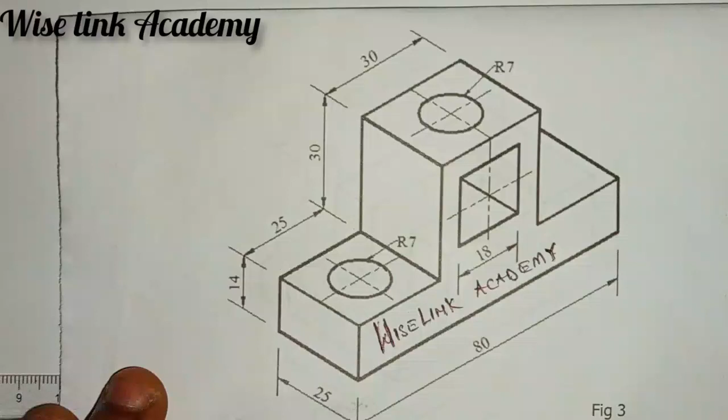Today we want to reproduce this isometric drawing. Whenever you hear the word isometric drawing, the first thing we need to do is draw our horizontal line and our inclined 30-degree line. The second thing you need to know is the height and the breadth. So let's first draw the horizontal line and the inclined line of 30 degrees.

Take your set square this way and draw a horizontal line, as you can see my horizontal line. Then take your set square and draw an inclined line of 30 degrees. You can see my 30 degrees. You come to this place too of 30 degrees. As you can see, what we are having.

Now let's proceed. The next thing to do is take your set square this way. At the center point here, you project a line, a faint line upward. You'll be having this, so you can see what you're having. I have successfully drawn my inclined line of 30 degrees, 30 degrees on each side.

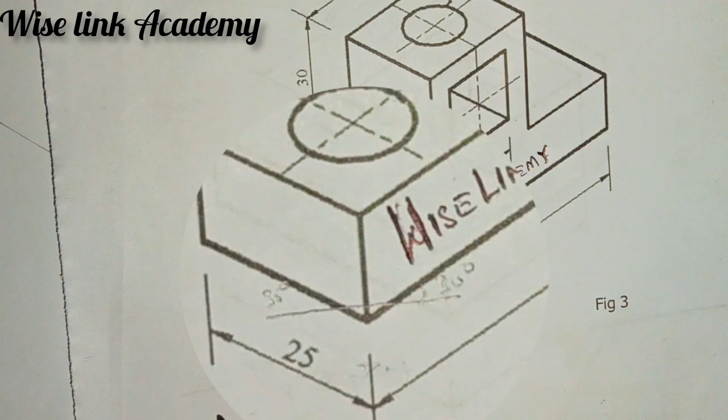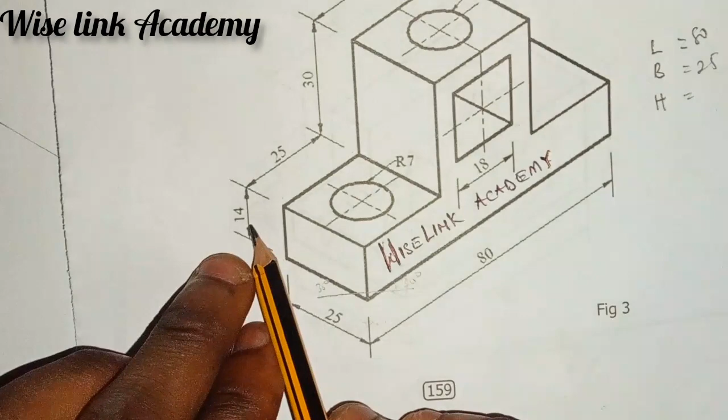Let's proceed. The distance from here to here is 80, and from here to here is 25. First we need to know the length, the breadth, and the height. The length is 80, the breadth is 25, and the height is 14 and 30. So 14 plus 30 will give us 44. So our length is 80, our breadth is 25, and our height is 44.

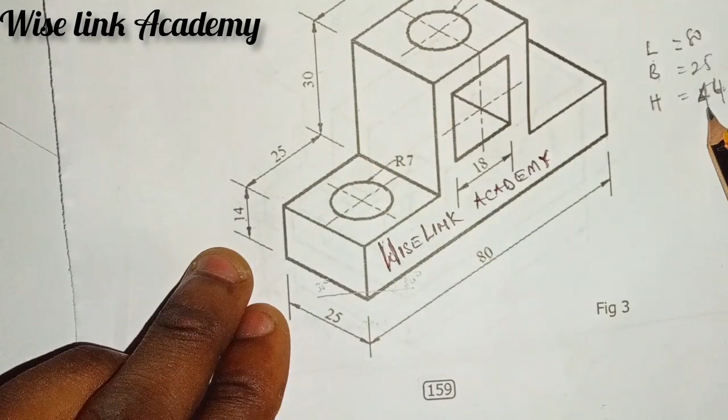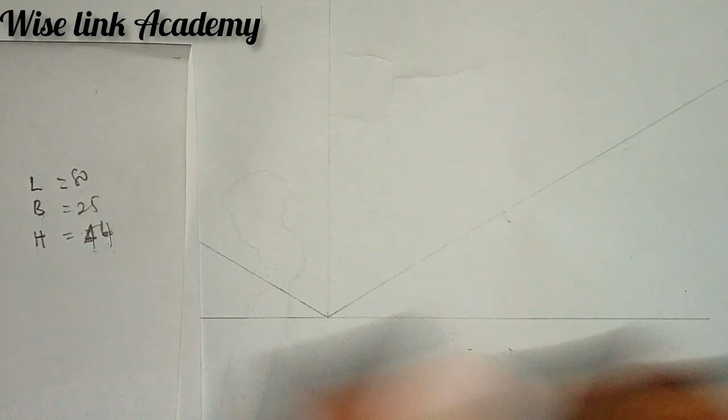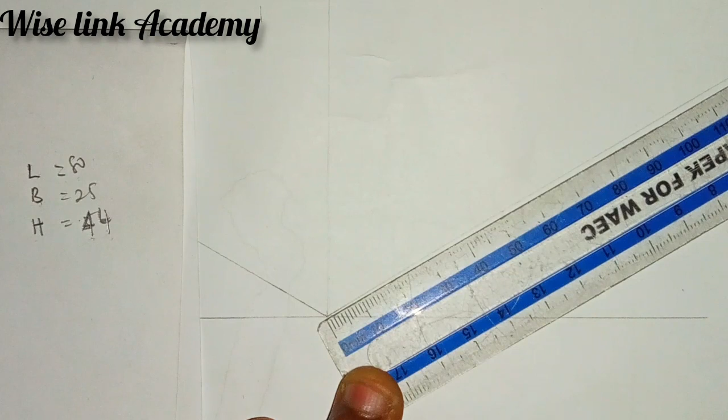So now let's draw this out. With our measurements, our length from here to here is 80. Let's measure 80 on our meter rule. From here to here is 80, as you can see. Then don't just leave it, indicate it.

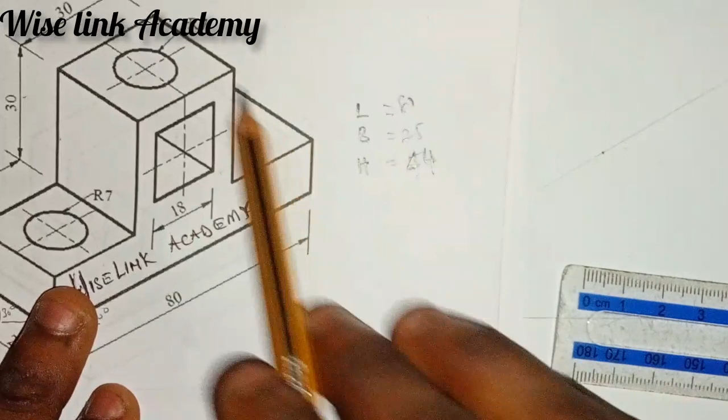The next one is here to here is 25. From here to here is 25. You are asked that the height is 44, isn't it? Let me show you, the height of this is 44 as we said earlier. So now let's do the necessary things we need to do.

With your T-square, you place it this way. As you can see, you place your set square on it. This point you have drawn, this 80 point, you draw it upward. This point 25 here too, you draw it upward as a faint line. As you can see, you'll be having this.

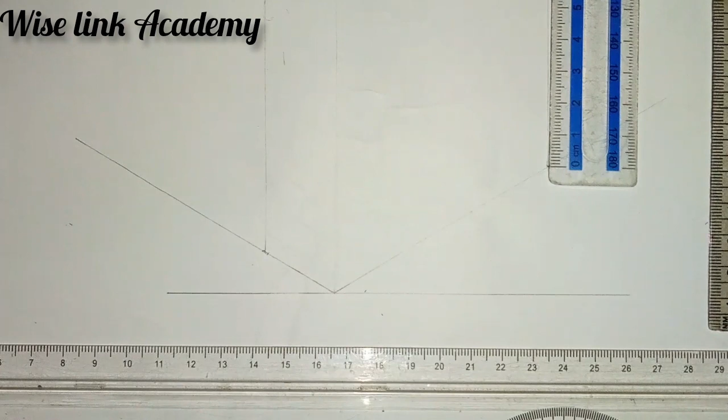The next thing is they said the height of this is 44, so let's measure 44 from here to here. Let me show you what I'm doing. Measuring 44 from here to here is 44, isn't it? So this is my height of 44.

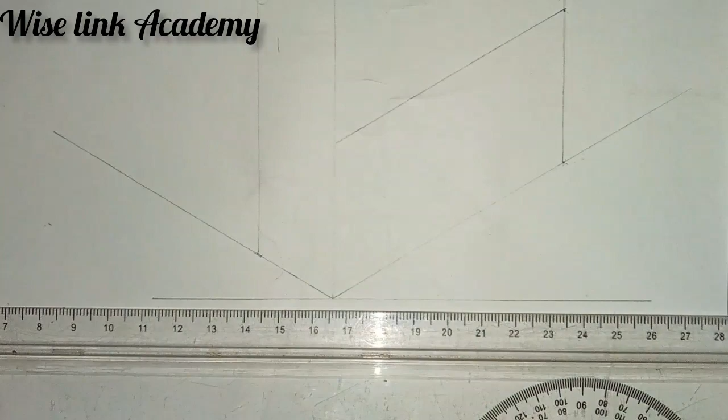So the next thing for me to do now, I have indicated this 80, 25, and 44. You take your set square this way, place it at this point here, and draw a faint line to this point here. As you can see, you take it again like this. Can you see that? You draw a line inclined to this.

As you can see, our aim is to form out a box, because anything isometric is carved from the box. So now let's cover this way. Can you see that? So you take out this like this. You take it this way. So where they are meeting, let's join it very well so that they meet properly. So they are both meeting at this point, as you can see.

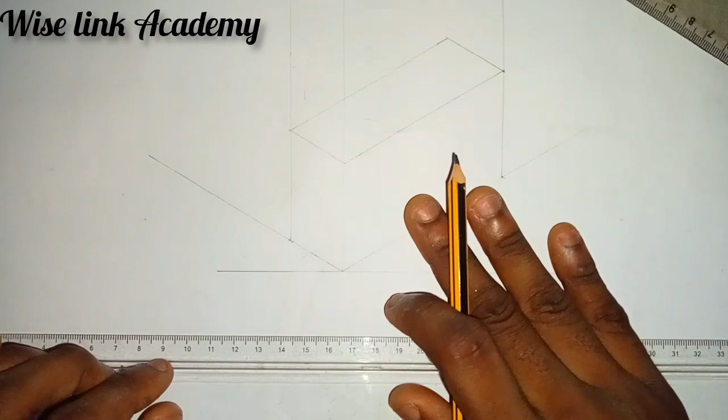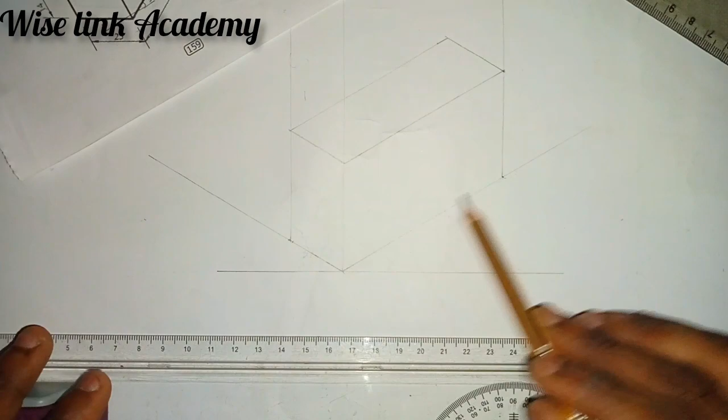So we have formed out this shape. From this shape now, I want to reproduce this. So here to here is thickened, and here to here is thickened. Let's thicken that. Here to here is thickened, here to here is thickened. I'll be having this.

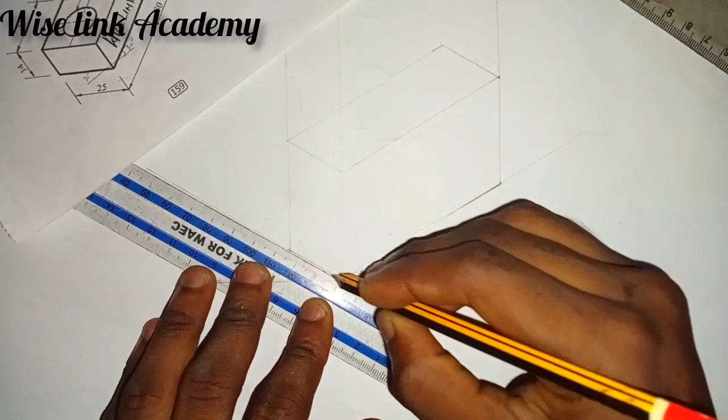Here to here is thickened, as you can see. Let's proceed. Here to here is thickened and here to here is thickened, isn't it? What do you observe in this place?

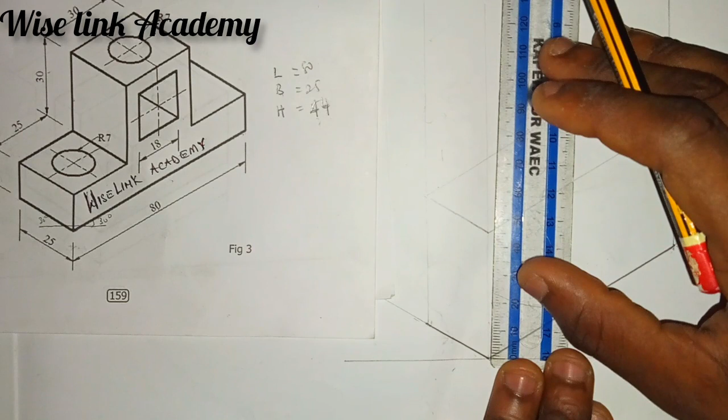Distance from here to here is 14. That is, from here to somewhere here is 14. Let's do that. So 14 is from here to here, somewhere to here. So this is my point 14 here.

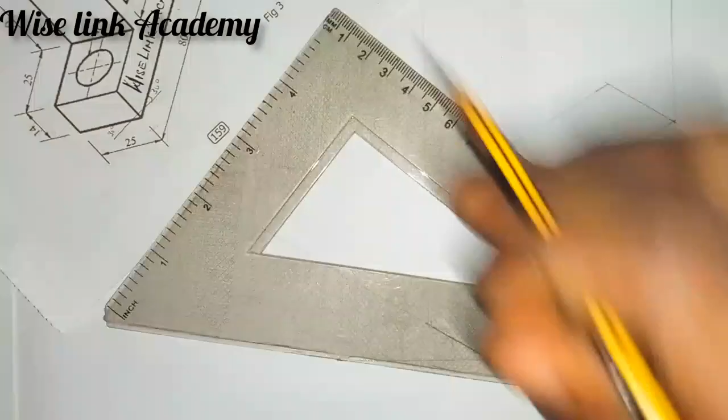I'll just take my set square this way, incline this way. From that point, you take it to this point here. I see that now with a faint line. You take it like this again to this point here with a faint line. But what do you notice?

Here is thickened, see? Let me show you. You can see that here is thickened. Let's thicken it. Thicken this place. I thicken this place.

It's thickened, isn't it? The next thing is what? Here too is thickened. As you can see, this place too is thickened. Let's thicken it. Here too is thickened. You can see that here too is thickened.

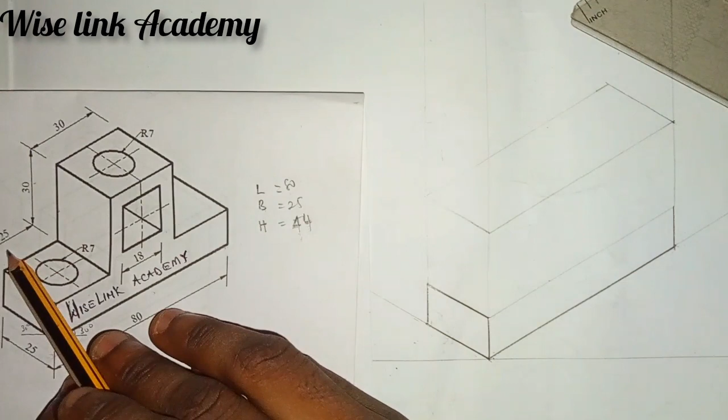So the next thing is what? They said from here, distance from here to somewhere here is what? 25. Can you see that now? From here to somewhere here is 25. From here to somewhere here is what?

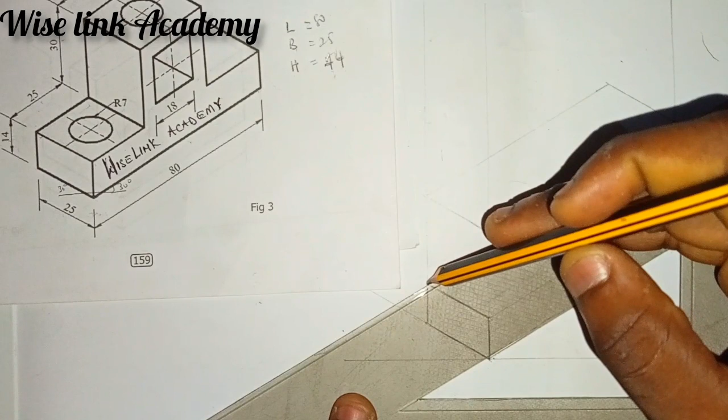25. That is, you take a set square this way, or you just measure 25 from this place, or you take it this way. You set square this way. As you can see, this way, you take a curve down this way with a faint line.

So you measure what? From here to somewhere here is what? 25. Let's measure 25 with our meter rule. So from here to here, 25. Isn't it? This is about 25.

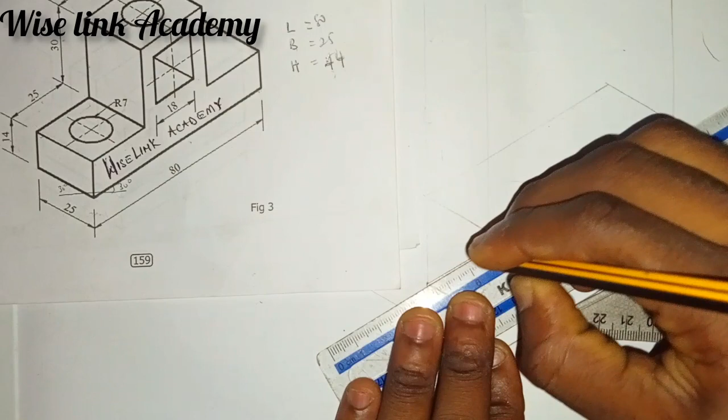I will thicken it because it is thickened. Let me thicken it. We're having this, isn't it? Then you take your set square this way, incline this way, you join it to this line here. You thicken it, it is thickened.

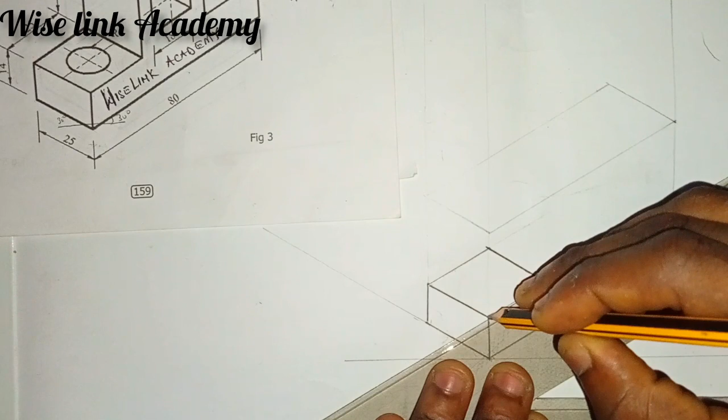You're having this. Can you see that? And you take it like this, you thicken this aspect too. It is thickened. As you can see what we're having.

As you can see, the next thing is what? Similarly, from here to here too is what? Also 25, because here to here is 25. Automatically, here to here is what? 25. Let me do 25. From here to here, 25

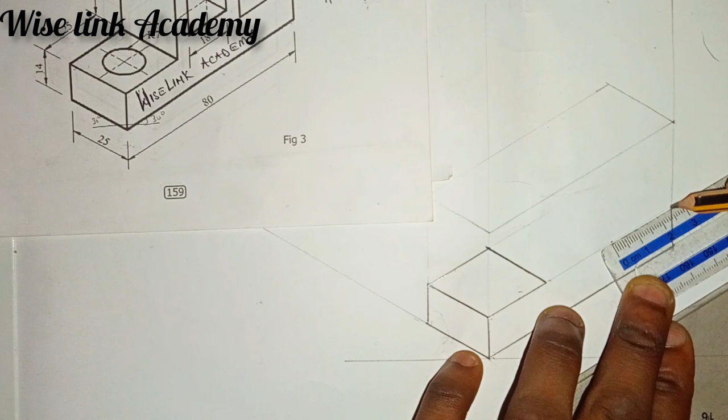starts here, as you can see. So I can just thicken it. Thicken this aspect here. So, what do you observe?

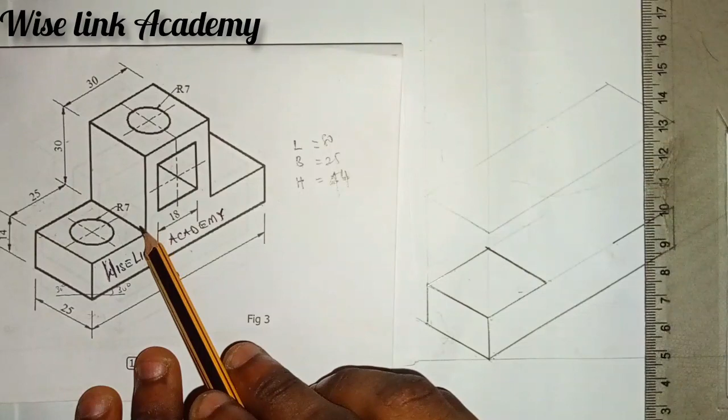What do you observe after thickening it? There is, as you can see, at the side of the screen, this place, there's a straight line upward. So let's draw a straight line upward from this point here.

I'll draw my straight line upward. Straight line, can you see that? From this point here, straight line upward, as you can see. Likewise from this point here, straight line upward. I'll be having all this, isn't it?

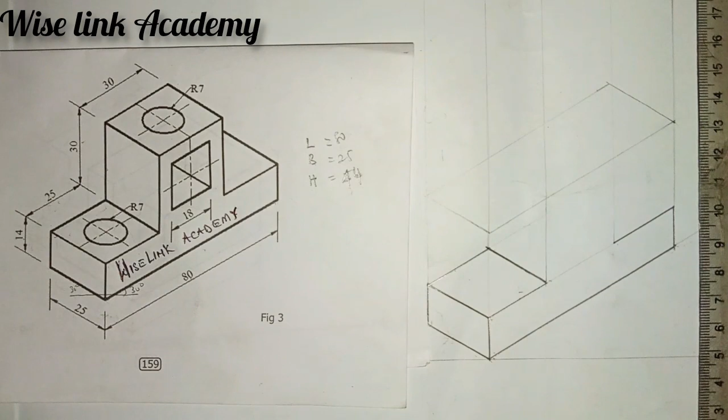So the next thing to do is what? They said from this point here, that is this point here, is this point here. I'm going to move 30 upward. So let's measure 30.

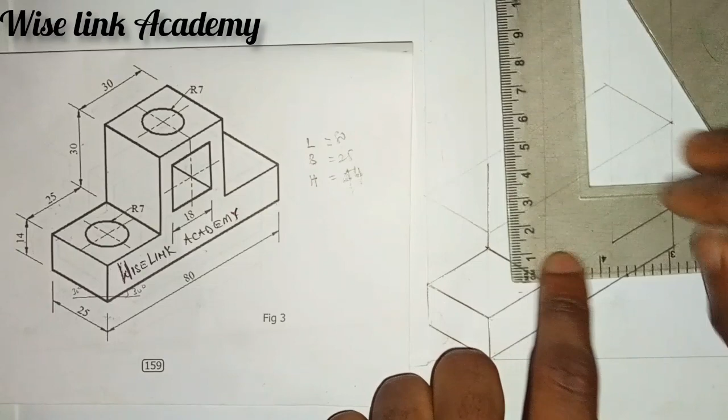This is my point 0, 1, 2, 3. This is my point 30. It is thickened. Let's thicken it. See the way I'm doing it? It is thickened.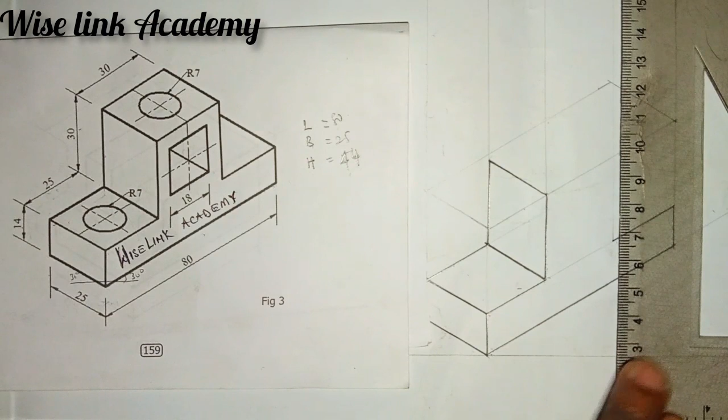From here now, as you can see what you're having, I said from this point you are seeing here is this point here. It has an inclined line of 30 degrees, 30. So you take your set square this way,

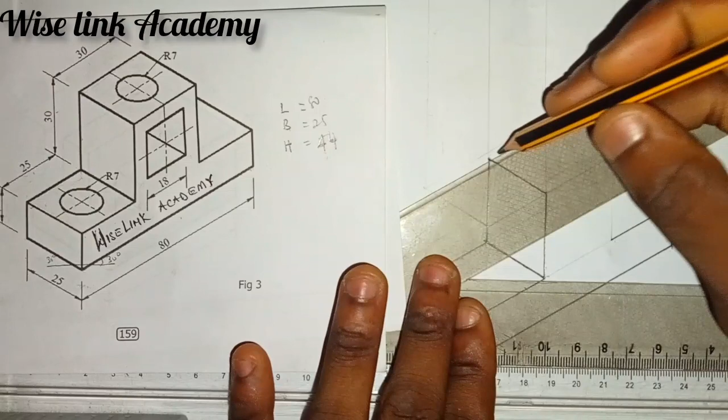take it this way. Can you see that? You draw from this point here, you draw an inclined line this way. This inclined line you have drawn, you measure 30 out of it.

Measure 30 from here to here. It's 30, as you can see. It's thickened. You thicken it.

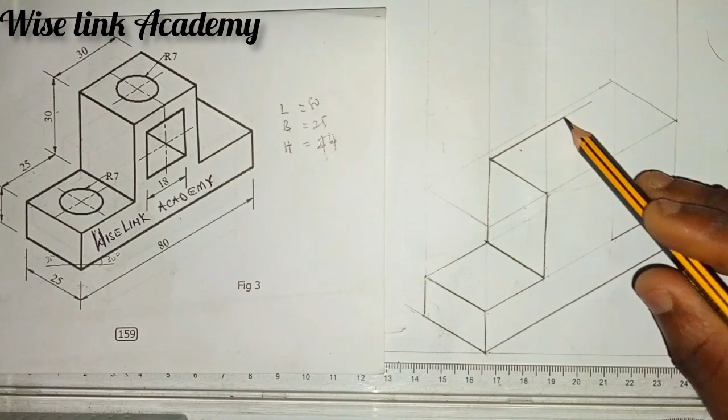I have successfully taken that. So from this point here, you join this point to this point, and this to this. You connect it, taking a set square this way, so you can see what we're having. From this point here, join it to that line you have drawn. That's what we're having. You can see we're gradually producing that isometric, as you can see.

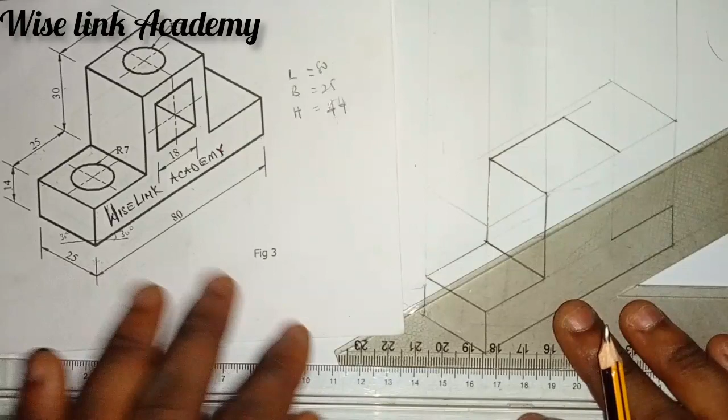So we're taking this aspect here, as you can see. Then, automatically, you join this point to this point. From this point here to this point, you'll be having something of this nature.

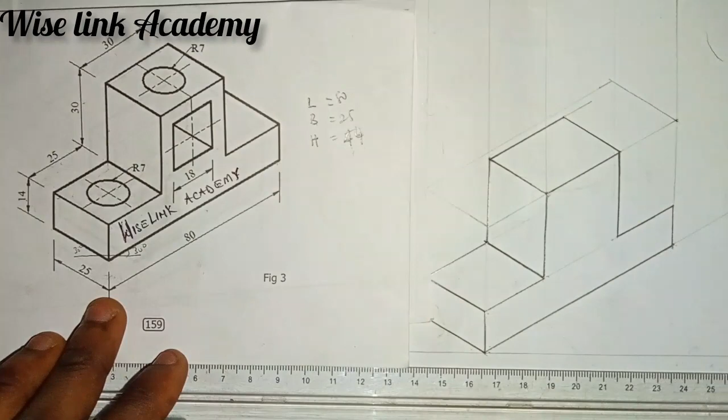So successfully, replicate what you are seeing here at this corner. But not true — what do you observe? There's an inclined line here, this line you are seeing here.

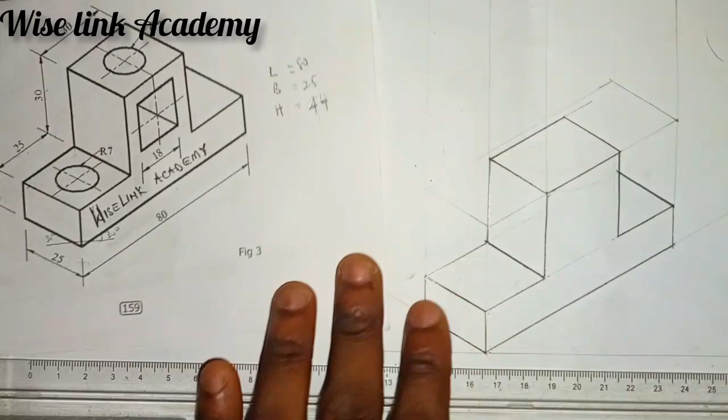So for us to do that, it's a very simple task. You take a set square this way, place it at this corner here, at this edge. You thicken it, connect it, thicken it. You'll be having this, so you can see that. Successfully, replicate what is here to this place. But we are having this, and this left.

So let's do that. For me to create this, let me start with this first. I want to draw out this. If I want to draw this, the first thing I need is the center point of this.

For me to get 30, half of 30 is 15, isn't it? And yet to get 25, half of 25 is 12.5, isn't it? So now let's do that.

Here I'll measure 15 from this point here. I'll measure 15 — is 1.5, isn't it? You thicken it to indicate it. And here is what — 12.5. Let me just say, let me measure 12.

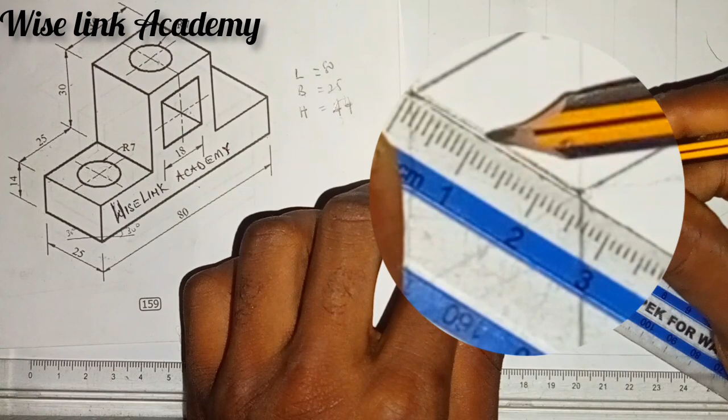See, measure 15. This is my center point here. So this is center point.

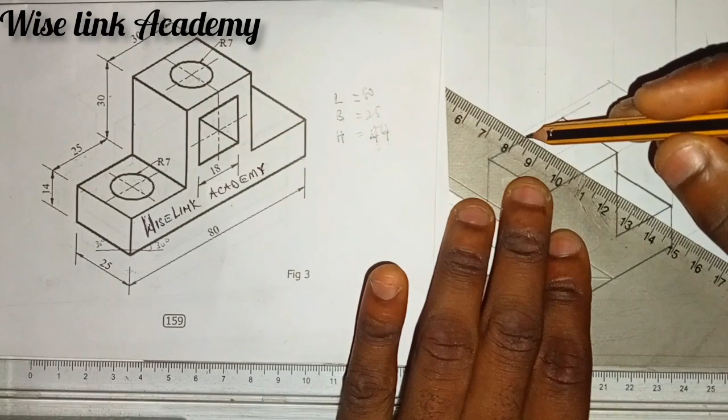So those center points you have indicated, you draw it this way — a straight, horizontal, faint line like this. Can you see that? You want to get the center point. Then you take it this way, another faint line this way. So where they are meeting here is our center point, isn't it?

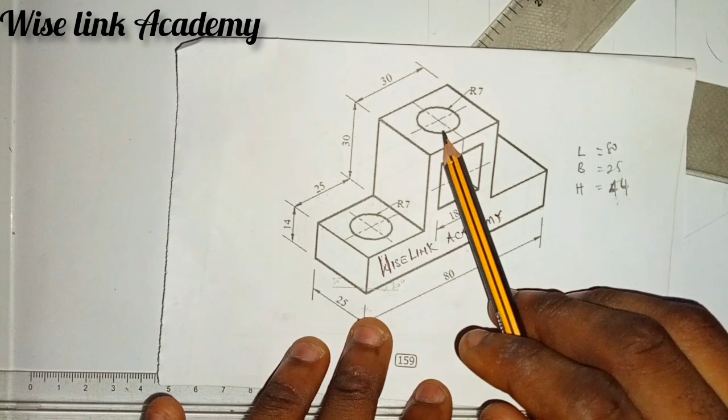So from that center point, I can easily draw this circle. But how? Let me show you what I'm saying. This circle, I can draw it by drawing a square. How will I draw the square? You take your compass — but before we draw the circle, I want us to draw this figure out first.

So from this center here, you take your set square this way, and project this line downward to this point here. So the center of this is this place. So I want to get the center of this place.

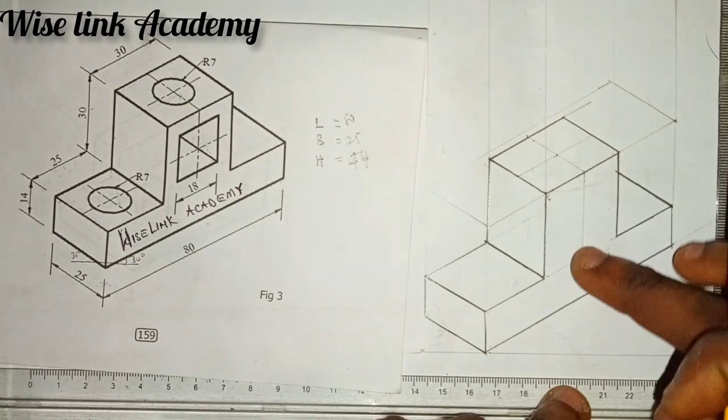So here to here is 30, isn't it? You measure 30, half of it is 15. Here's 15, isn't it? Then, from that point 15, you take it like this, project it this way. Here's our center point, isn't it?

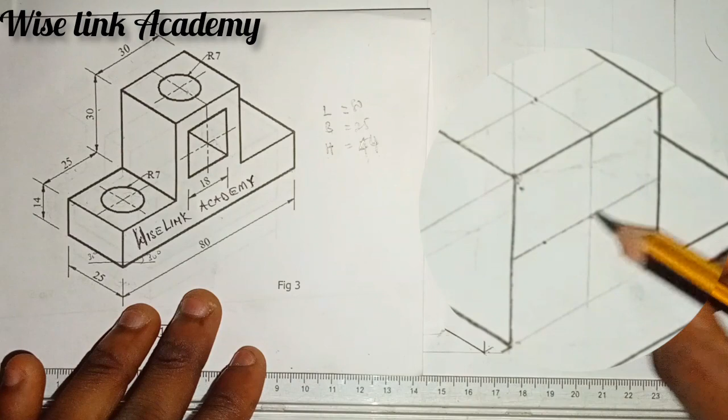So from the center point, I want to develop out this 18. So we're drawing this to produce out this 18. So 9 plus 9 is 18, isn't it? You take your compass, you measure 9 from here to here — is 9, isn't it?

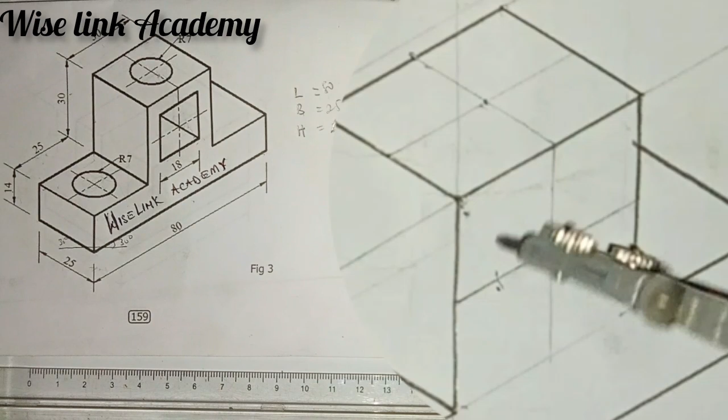So you take it this way — 9 here, 9 here, sum up to 18. Can you see that now? So you take it up, down, up here and down here. Can you see that now?

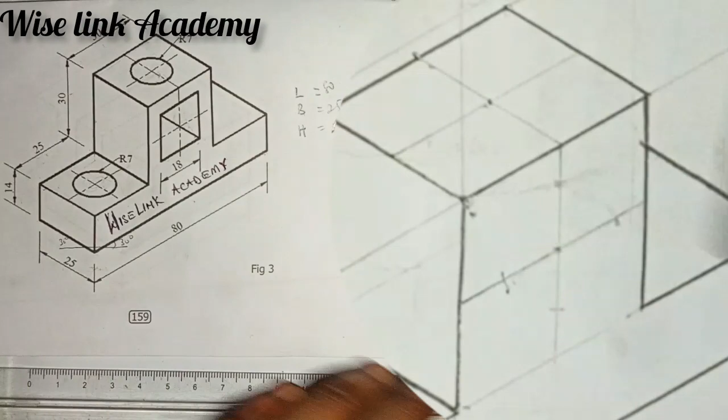That's what I'm doing now. So similarly, you'll be having this. I have indicated 4 points here. So I'll just take my set square this way, incline this way.

That point here, you draw a faint line this way. And see that you come to this place, this point here, draw a faint line this way. As you can see, then from this point, draw a what?

Take a set square this way. You draw a straight line this way. Come to this point here, you draw a straight line this way. So it is thickened — I can easily thicken this.

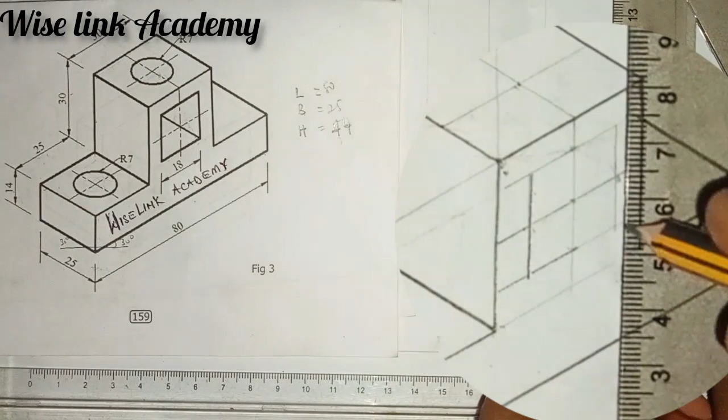Come to this point, thicken this point. Come to this point here, thicken this point here. Come to this upper point, thicken it, because it is thickened.

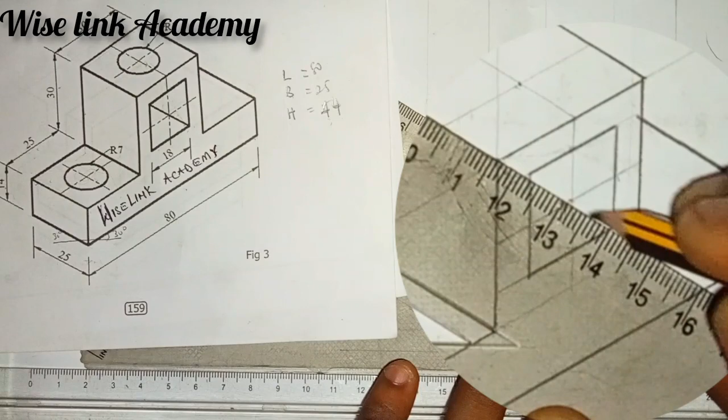What you observe — you take your set square this way. From this point here, you join it to this point. You have successfully drawn this cut section here. Let's come back to this point here.

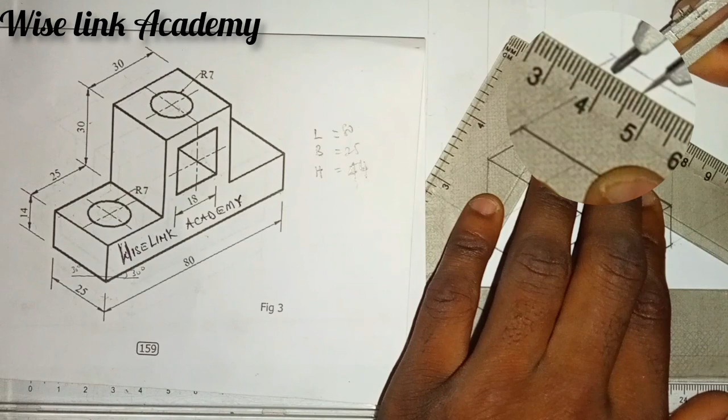It has a radius 7, isn't it? Take your compass, you measure 7. So let's measure 7 from here to here. It's 7, can you see that now? So my 7 — place your compass at this point, cut it. Sorry.

From this point here, measure 7. This is my 7. Ticking this side, ticking this side, and you strike this side too.

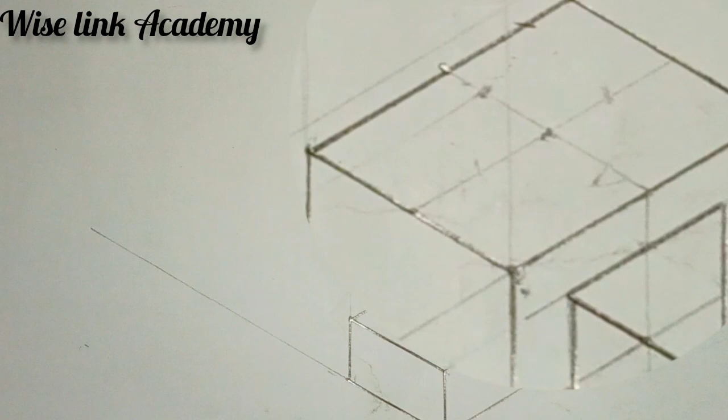We're having this, isn't it? So I can easily establish this to be this. You take it from here, this meeting point here.

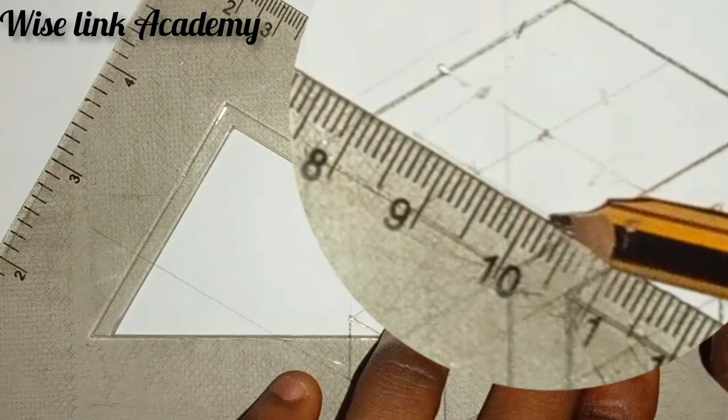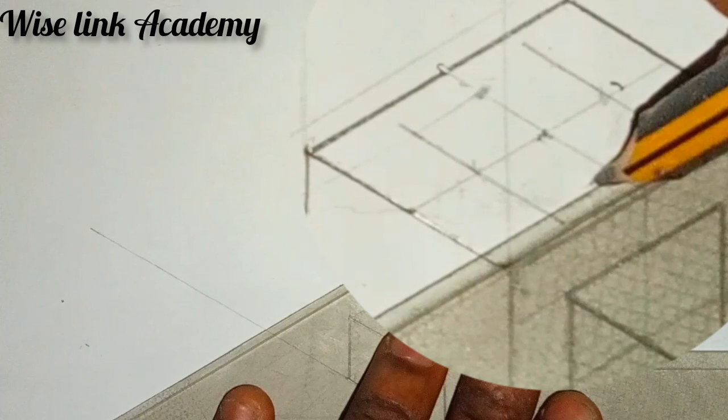Take it like this, you draw a faint line this way. Other side here, a faint line this way. You take it this way, draw a faint line this way, and a faint line this way. Now the next thing to do, if you want to draw the circle, this circle.

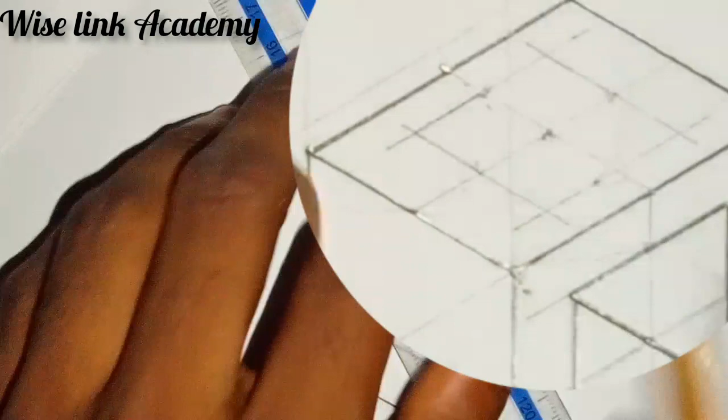I want to draw out this circle. So let's do that. Now from this, I'll join this point to this point, and this point to this point. So you join this point here to this point with a faint line, and this point here to this point.

Can you see that now? So which one is the longest part? From here to here and here to here, which one is the longest? Here to here is the longest. You join it together.

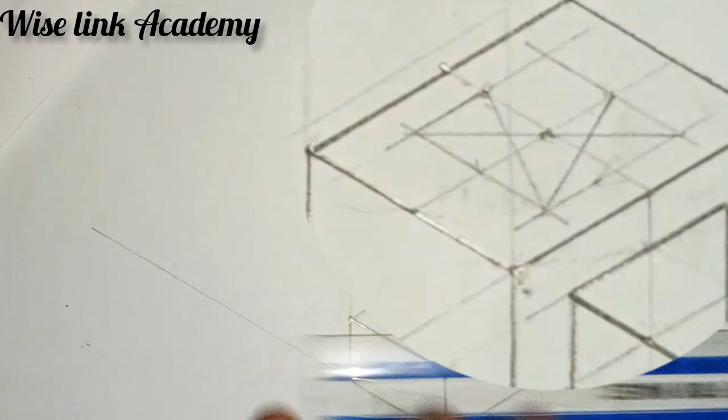You can see that you'll be having this. So take a compass this way. After taking a compass this way, you place it at this point here, this point here. You just get it to form a circle.

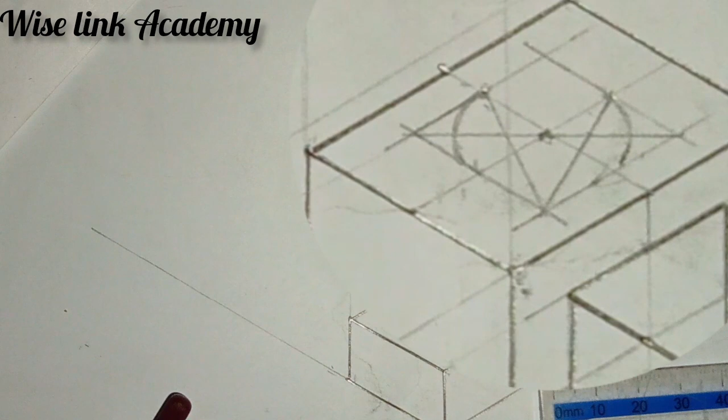You'll be having this. You come to the other side here, you get it to form a circle. You'll be having this. After gauging, you come to this ending point here, you gauge it so that it produces a circle for you.

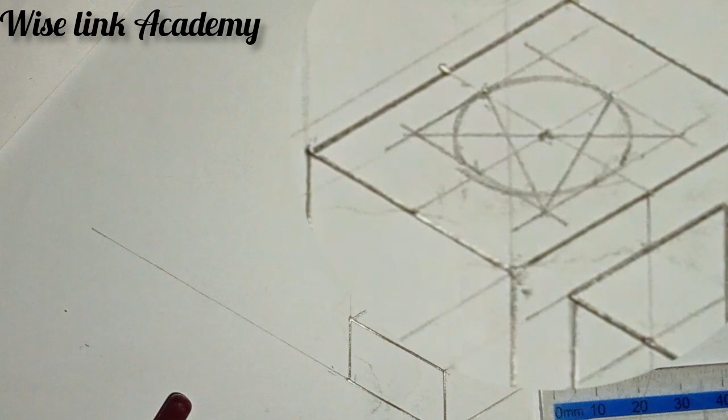Come to this end point here, you gauge it. As you can see, I've successfully drawn that upper circle. Can you see that now? So the same thing is applicable to this aspect here.

We have distance from here to here is 25. Let me show you, from here to here is 25. So I'll measure out half of it. Here to here is 25, half of it, measure it out.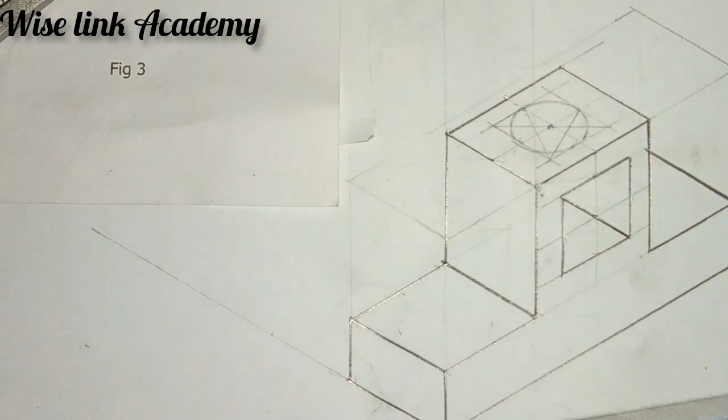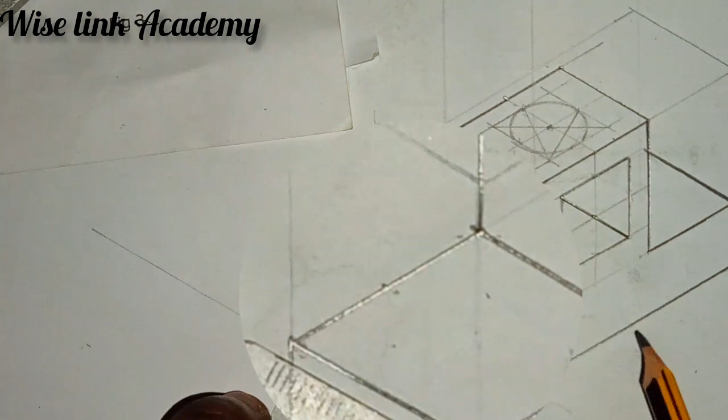So for us to find the center point of this, doing that I'll be measuring half of it here. Half of it here, as you can see that.

So I've indicated the two halves of the sides. Take it this way, draw a faint line. So I see that now. Take it this way, you draw a faint line here too. So they are both meeting at this center point.

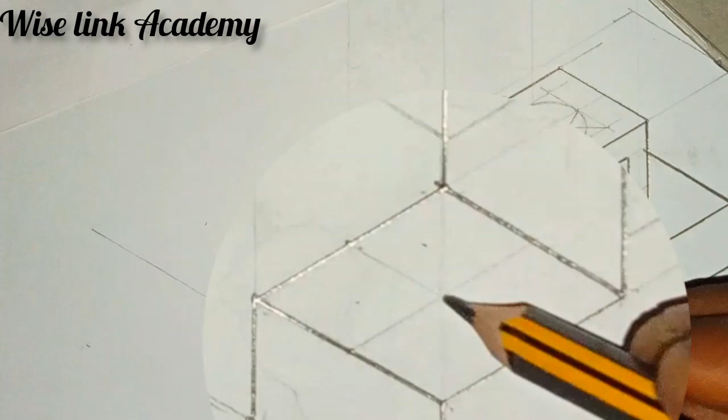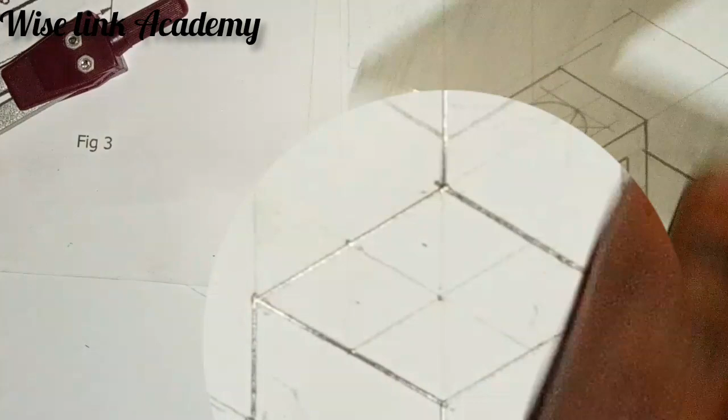So now at this center point, I'll place my compass. We're having the same radius as this one, radius of 7. You measure 7 again as we did earlier. Take your compass, 7 from here to here is 7.

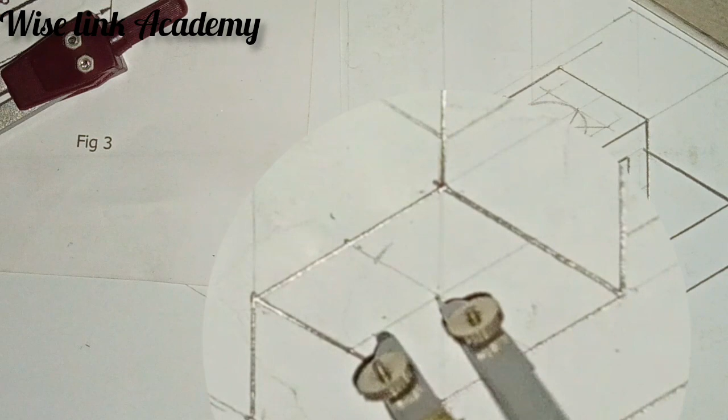As you can see that, let me show you. 7 from here to here is my 7. So just take a compass this way. This is my 7, you take it at the center point. You cut this side, left, right, and the bottom.

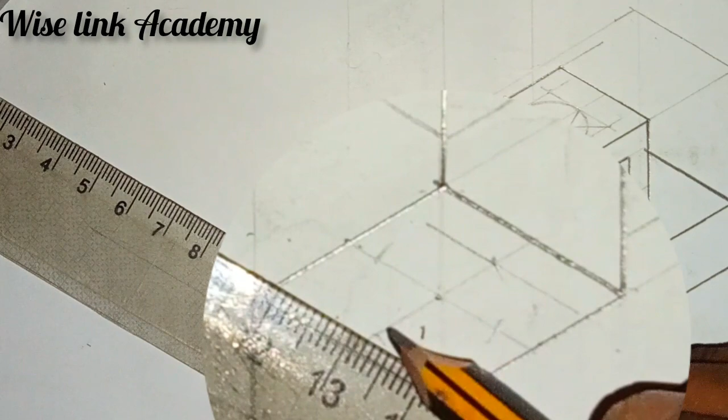After you've successfully drawn this, you take your set square this way. You draw an inclined line using your pencil, a straight line this way, an inclined faint line, inclined line here.

You turn your set square this way. I see that you draw an inclined line, you come to this place, and also an inclined line.

You'll be having this. So as I said earlier, what we did here, we're going to do it here. You will join the longest part together, here and here, and here to this place, which are long. From here to here is long, you join it together.

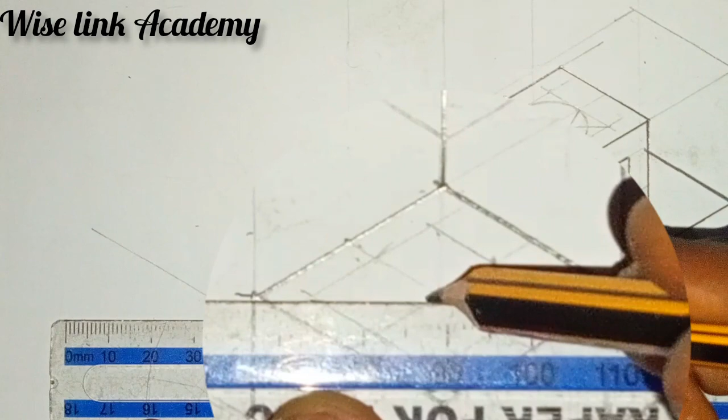So you join this point together, then you join this point here to this point, then this point here to this point. You'll be having this. So similarly, you take your compass to this place, you gauge it.

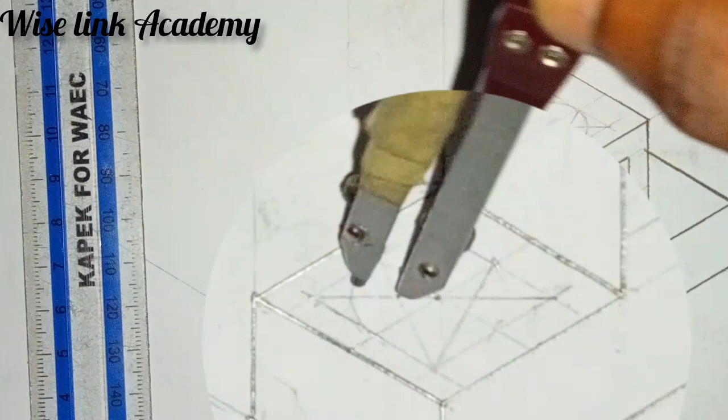So as to have a circle, isn't it? For us to have a circle, you'll be having this, you gauge it. Can you see that? You come to this side too, at this point, you gauge it.

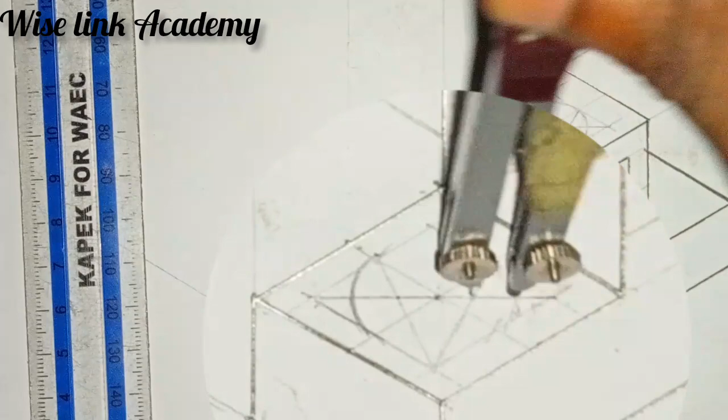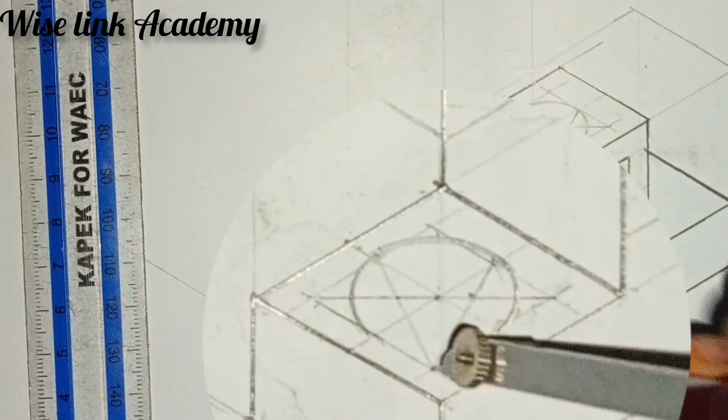You're having this. As you can see, similarly, you come to this point here, you gauge it, you come to this point here, you gauge the last part, you gauge this part too.

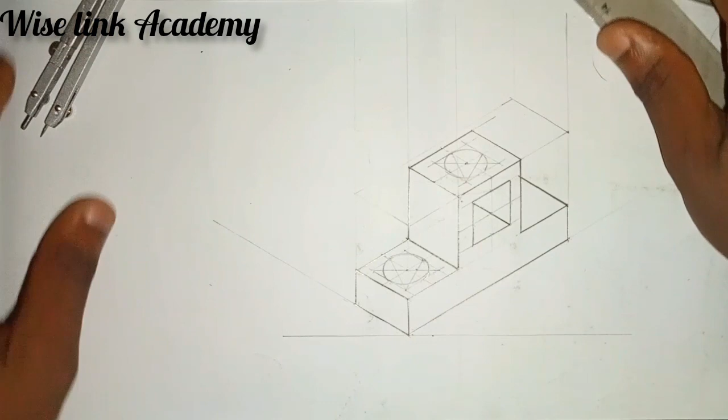And like, as you can see, we replicate what is here to this place. So thank you for watching.